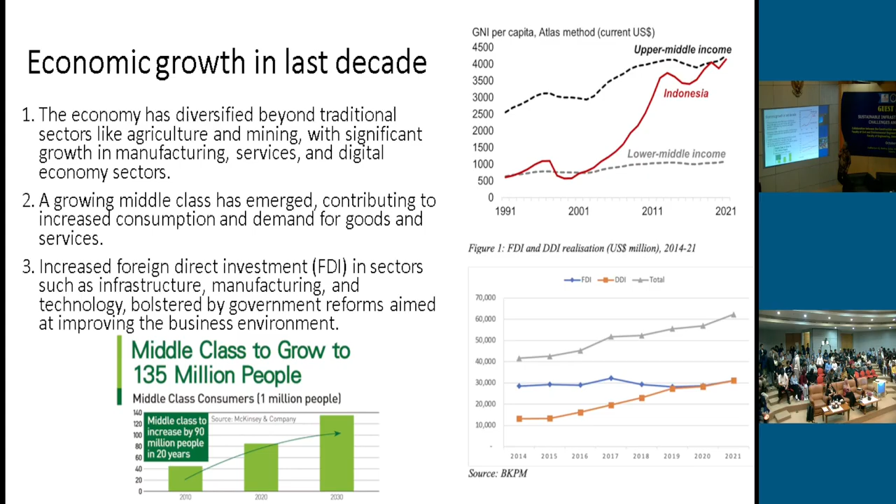On the other side, we also have foreign direct investment in various sectors including infrastructure, manufacturing, and technology. Maybe not very high compared to other countries in the region, but it has helped boost our economy. Although the total is not highly increasing, we have a stable increase in foreign direct investment, stabilizing at around 30 billion US dollars.

Related to this economic development, we have a big need for infrastructure development, which is considered a cornerstone of our economic growth. It boosts productivity, enhances connectivity, and promotes economic inclusivity. Hopefully it can also attract investment despite all the challenges we have. What we need is more sustainable growth supported by infrastructure projects.

For example, public infrastructure investment in the past 10 years has more or less increased, although there was some lag in certain years due to COVID in 2020, but after that it has been steadily increasing. This is a comparison of infrastructure investment in Asia by country, and Indonesia is somewhere in the middle in terms of percentage to GDP — not very high, but also not low. Hopefully in the future it will increase.

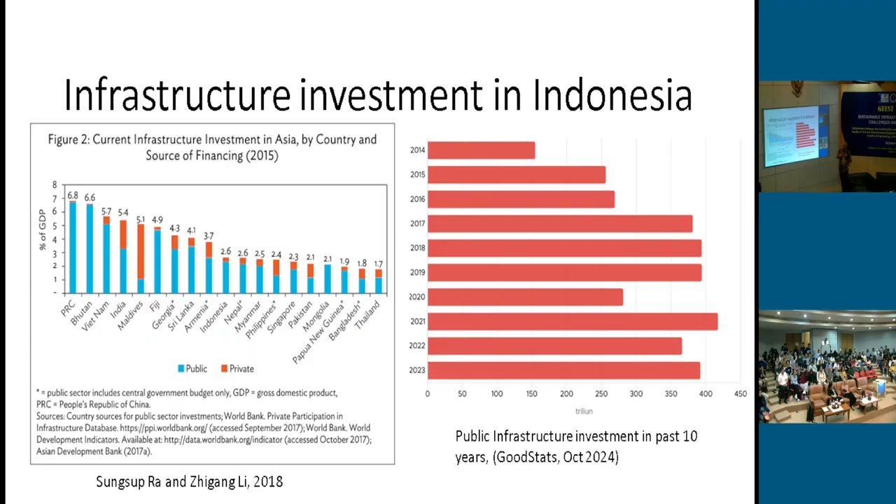Comparing to China, which is almost 7% of GDP, Indonesia is only around 3% of GDP, which needs to increase to have more stable growth in infrastructure provision.

Yeah, this is just an example. In the past 5 years, for example, the achievement in the construction or development of the toll roads, jalan bebas hambatan, freeways in Indonesia. We have 2,700 kilometers all over the country. Maybe compared to China, not much, only within one province. But for Indonesia, 2,700 kilometers is something. Compared to 10 years ago, we had only less than 200 kilometers. So within 10 years, we have 10 times more length of freeway all over the country.

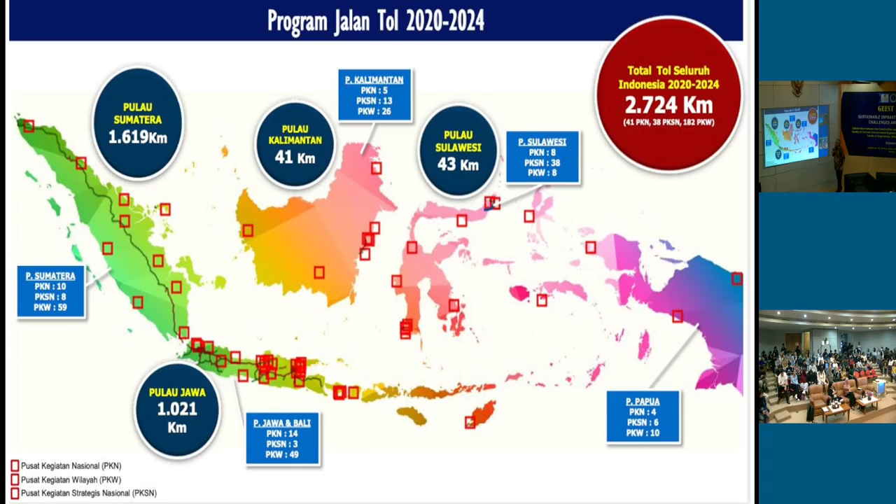Mostly in Java, where we have our concentration of population, but we are also developing highways in Sumatra, the Trans-Sumatra Highway and Trans-Sulawesi Highway. Next.

This is also a plan for investment in the energy sector, to develop the promotion of investments in different parts of the country. The total investment need is up to 10 trillion rupiah in 2020. Now it's much higher than that. Next.

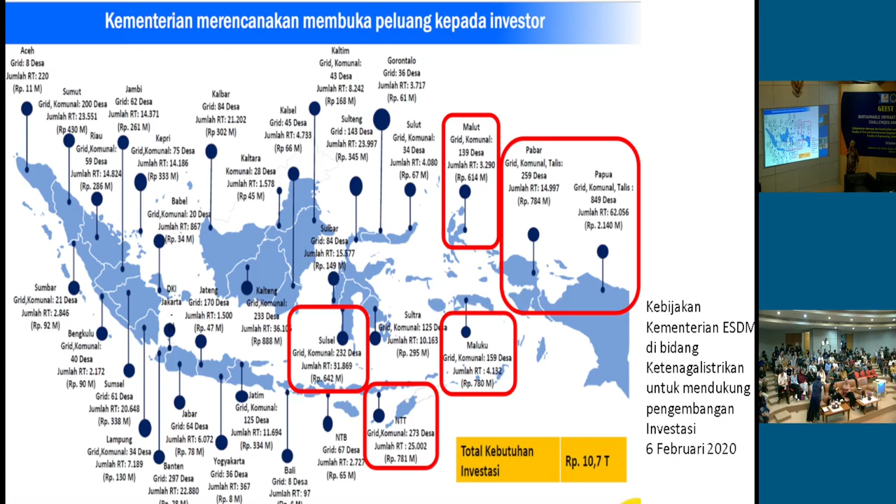We also have a target for 2045, Indonesia Emas, with 5 visions and 8 agendas, and infrastructure is part of the agenda to support all the target achievements in 2045. Next.

Related to infrastructure in 2045, this is our long-term development plan to 2045, to develop connectivity infrastructure and multimodal transport integration. Our goal is to have complete multimodal transport infrastructure, including road network, airports, seaports, and electricity transport. This aims to improve mobility and accessibility of the community to industrial locations and trade centers, thereby facilitating a smoother flow of goods and services.

And also, one of the other targets is to have energy infrastructure most related to new and renewable energy. This is to support the sustainable development goals, because we have an energy transition plan from fossil fuel to more sustainable energy sources, including solar energy, wind power, hydroelectric power, and natural gas.

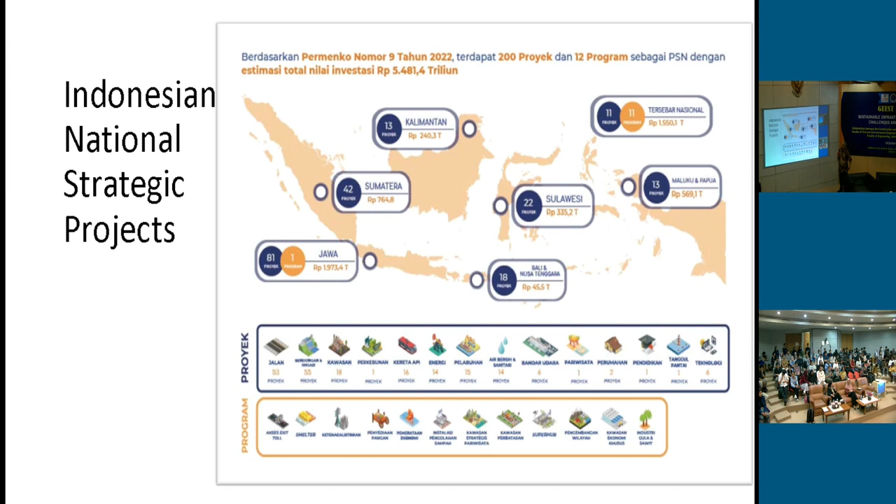Next, we have some listing of, for example, by December 2024, 10 strategic projects. Many of them related to infrastructure, for example, toll roads, industrial parks, new energy in the Morowali area, development of waterfront coastal areas, and also some industrial parks. This is to be completed this year.

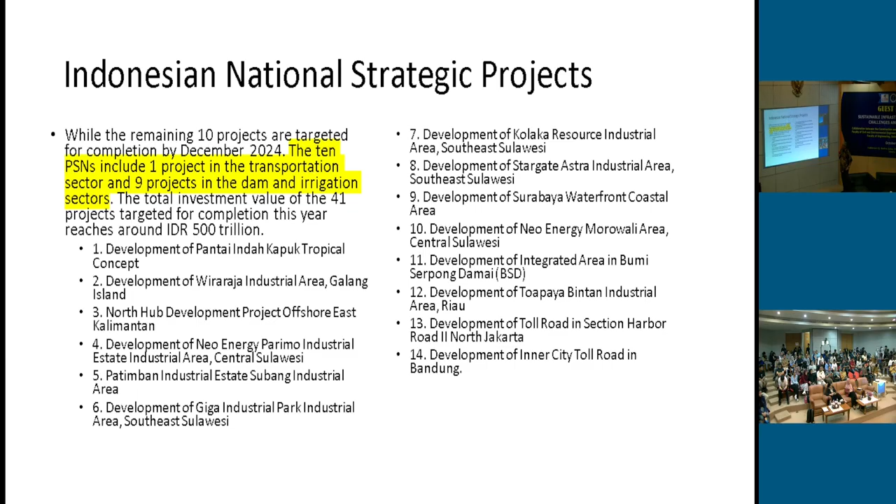Next, we also have a very big investment for Indonesia, the new capital, Ibu Kota Nusantara, with the target toward 2045 Indonesia Emas, which plans to be developed in 3 stages: 2022 to 2024, 2025 to 2035, and toward 2045.

We just heard from our new president that he committed to complete the main constructions in 5 years, until the end of his term in 2029.

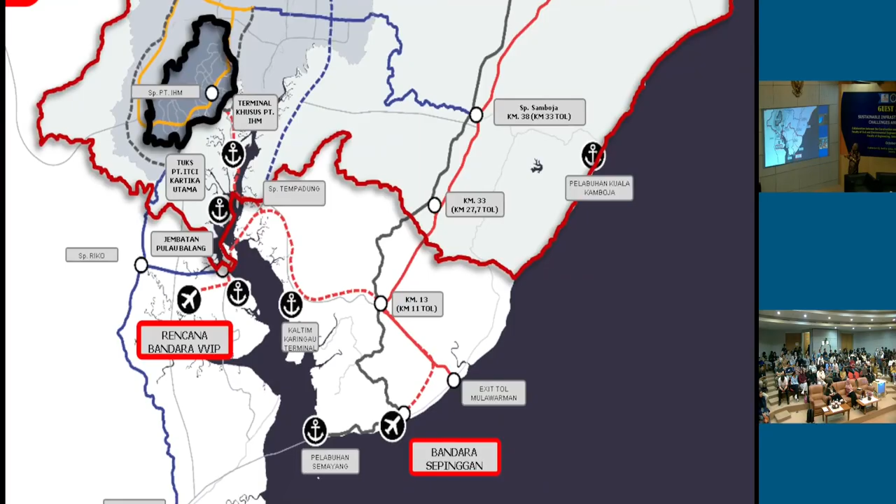Next, this is, for example, the plan for transportation connectivity. Can we go back a bit. Transportation connectivity for the toll roads.

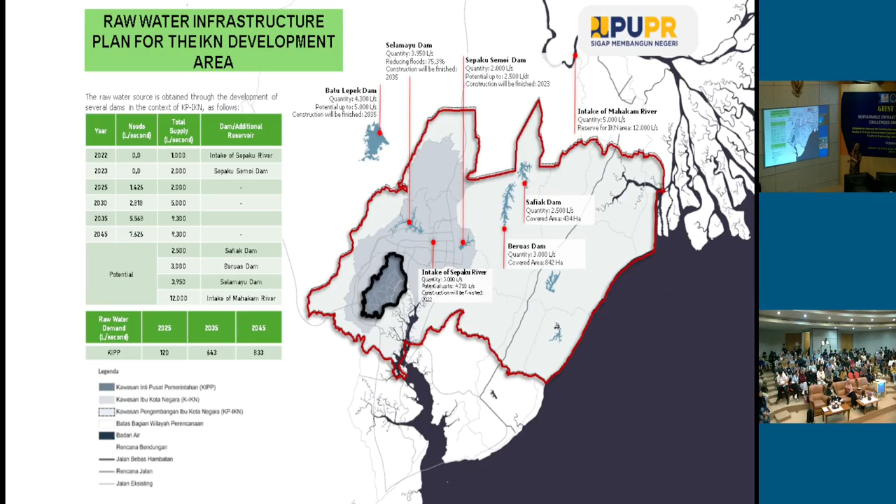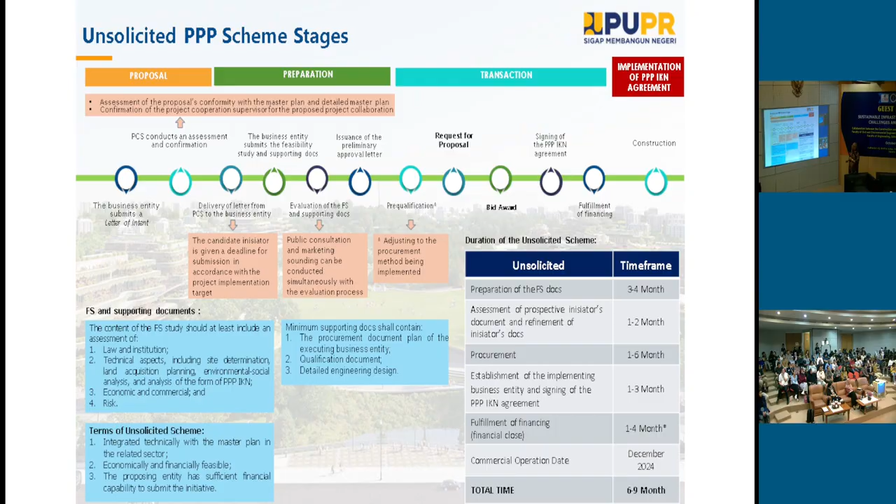I would like to talk also about something different. This is an interesting project in collaboration with China, part of the One Belt, One Road or OBOR project, which is an ambitious plan to revitalize the Silk Road Economic Belt.

We have agreement for 23 cooperation projects in total, and 5 of the 23 projects amount to $14.2 billion dollars.

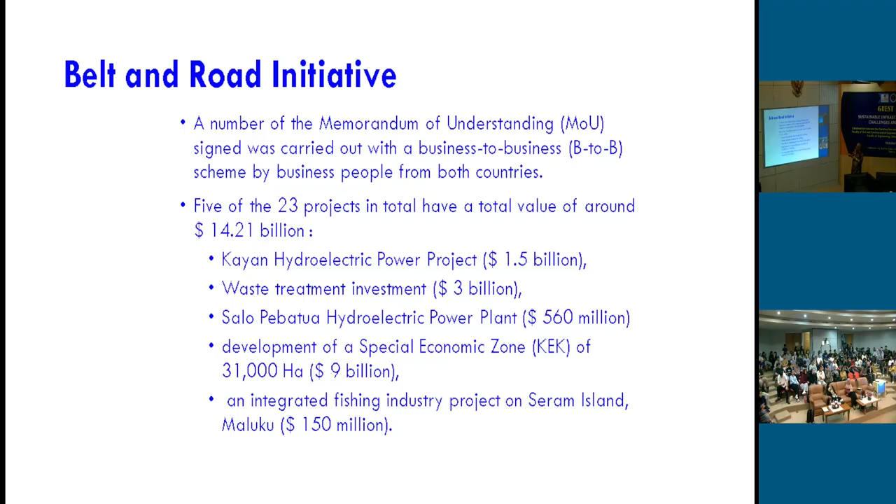In North Sumatra we have the port hub of Kuala Tanjung International Industrial Estate, Sei Mangkei Industrial Park, a gas power plant, and also the Kualanamu International Airport.

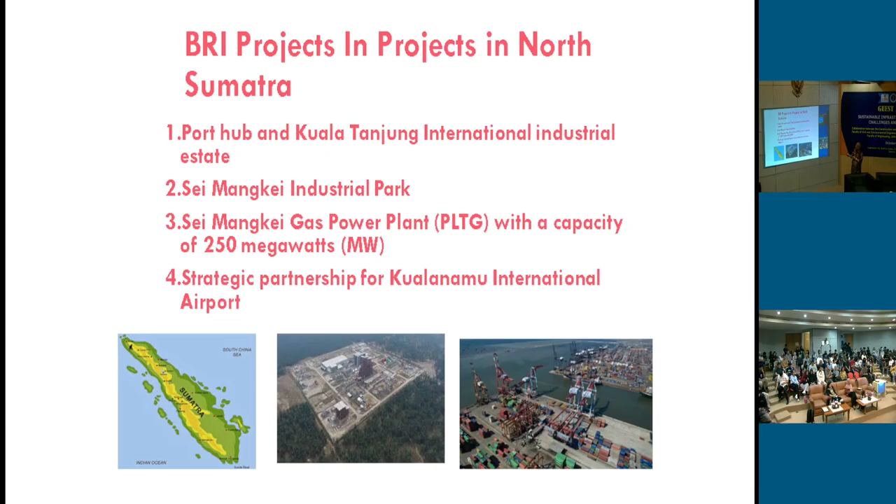In North Kalimantan we have the International Port Industrial Area in Tanah Kuning, the Economic Zone, Strategic Industry in Tanah Kuning, and also industrial estate infrastructure and public facilities including the port, integrated grid for power plants, and the Kayan Hydro Energy power plant.

In North Sulawesi, it's basically a tourism area, the Likupang tourism area, and also the industrial area in Bitung. In Bali, there's the Turtle Island Techno Park project.

Outside priority corridors, we have also 8 projects, mostly on energy, like coal-fired power plants, and also some projects related to integrated industrial areas.

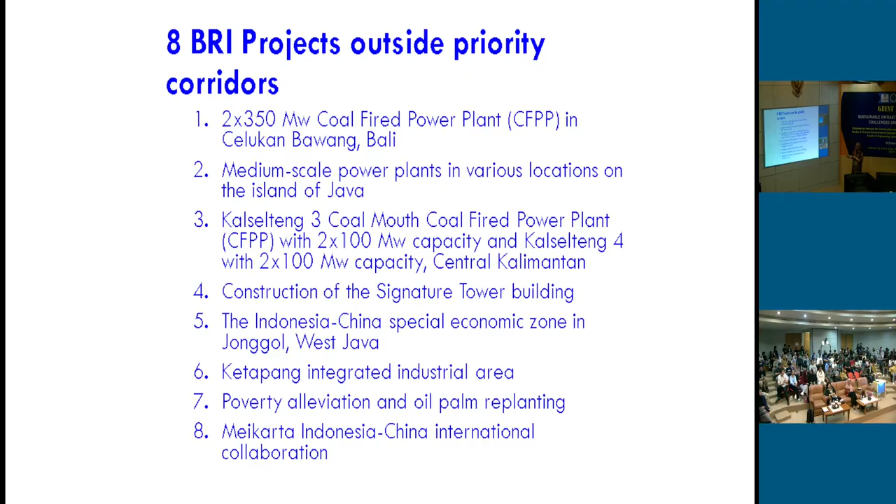In particular, the Jakarta-Bandung High Speed Railway, Kayan River, and Kuala Tanjung are the largest infrastructure investments in Indonesia for the Belt and Road Initiative. The Jakarta-Bandung High Speed Railway is already operational now in Indonesia. It runs 140 kilometers and is already operational.

Maybe when you visit Bandung, you will use this train.

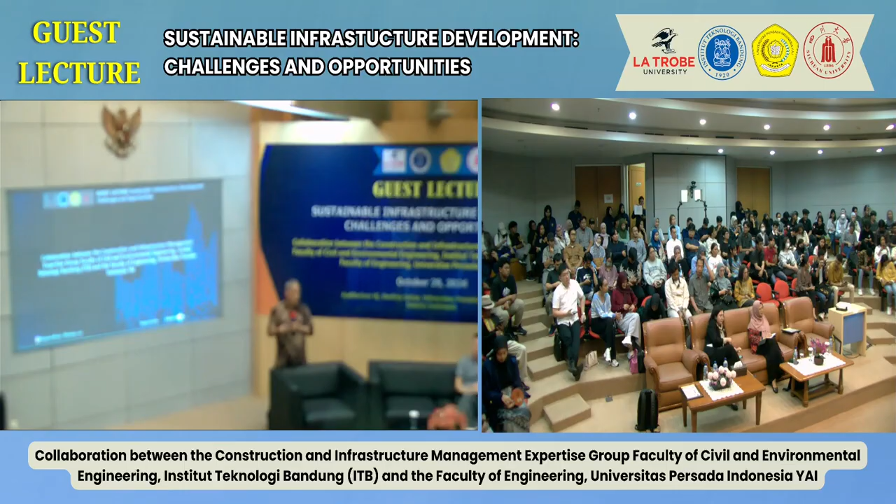Okay, I think for 30 minutes that's all. This was just an introduction to infrastructure development in Indonesia and the needs of the future. I haven't had enough time to discuss the challenges. Actually, we have many challenges, already elaborated by Professor Indri in her introduction speech—the disparity and also issues related to the regulatory and legal system in Indonesia, which is not very clear regarding infrastructure development. So we have a large amount of homework on this.

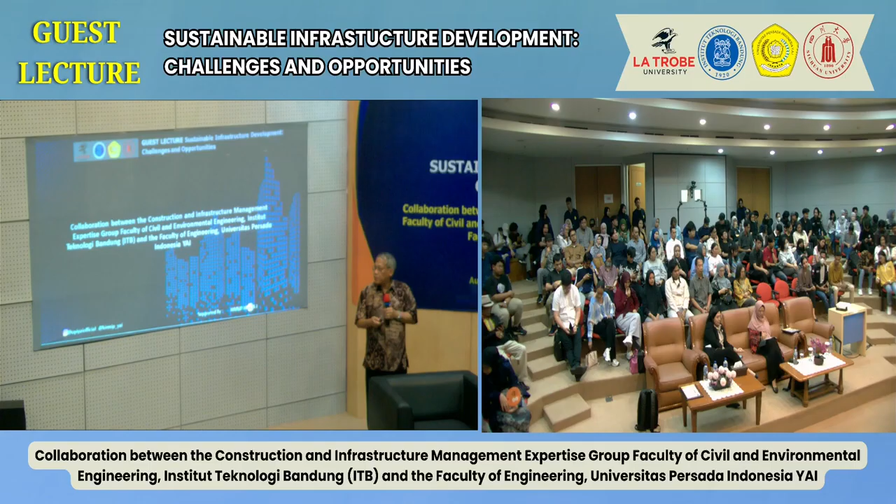Maybe Professor Chan will also talk about the hurdles we have, in particular for PPP projects in Indonesia. I would like to close my presentation here. Thank you very much for the opportunity to give this short lecture. Thank you.

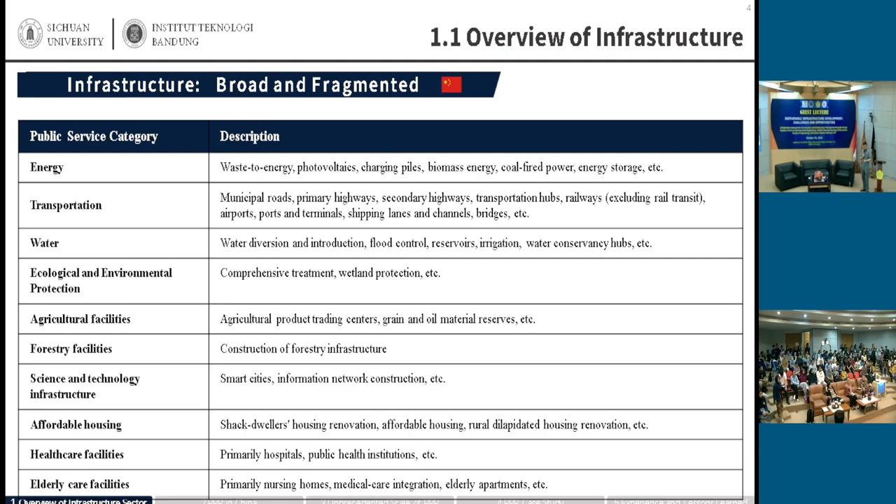So, the key thing is, what's the relationship between infrastructure and the economy? But I cannot turn the slide, actually. Can I? Can you? Oh, okay, all right, thank you. Can I turn pages? Still cannot. But this is the pointer, right? I'm going to turn pages, but, huh? Okay, next please, okay.

So here's the relationship. In development economics, that's a branch of economics mainly focusing on how economic growth could be achieved, those economists give us such a relationship between infrastructure and economic growth: there's a kind of interconnection. So if you have infrastructure in place, then you have a push to your economic growth. However, to have infrastructure built, you need to have the money to fund it. But where does the money come from? From your economic growth. So just like the chicken and the egg, who is first, who is second? That's a little bit complicated. But basically, we believe infrastructure has a primary push to economic growth. So you need to have infrastructure in place, and then you enjoy growth. Based on statistics by Boston Consulting Group, for every $10 increase in infrastructure capacity, $3 per annum in extra economic activities could be achieved.

What do we do? I also talked to some people who told me the renewable energy here in this country is even at its initial stage. Solar power is pretty weak - your installed capacity of solar power is almost none. So if some of you young people here focus on solar power, if you get some technology from China, if you set up a small factory manufacturing those solar facilities, believe me, you can make a fortune.

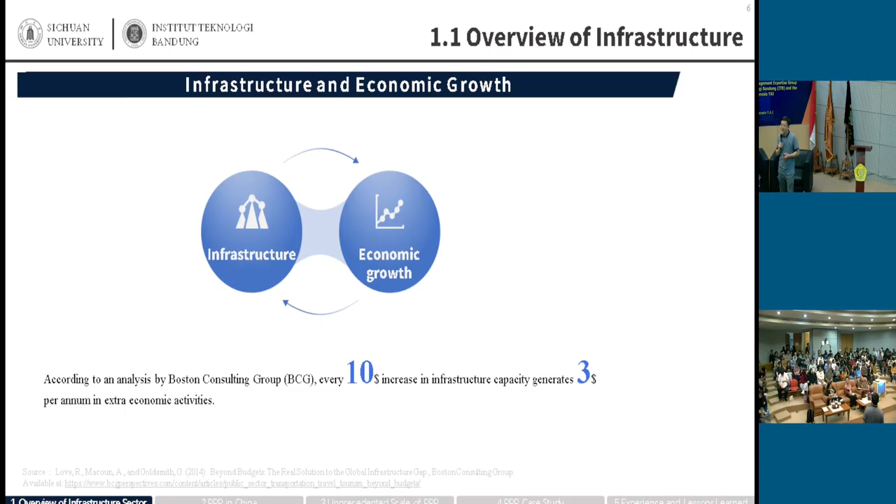You will have your time very soon. Just an interruption - I think everyone should take a chance to visit China and Australia following this seminar. See by your eyes, I think that's highly important, because just hearing is not enough.

Another piece of information from Boston Consulting is this chart. When I first saw it, it was so appealing to me, so I can't help introducing it to you. Here is a chart that shows by 2030, the world needs so much infrastructure in place, but in 2013, 10 years ago, we had the existing capacity of infrastructure at this point. Over time, some of it will lose its function, so the existing capacity will go down. We need new infrastructure to be installed over time.

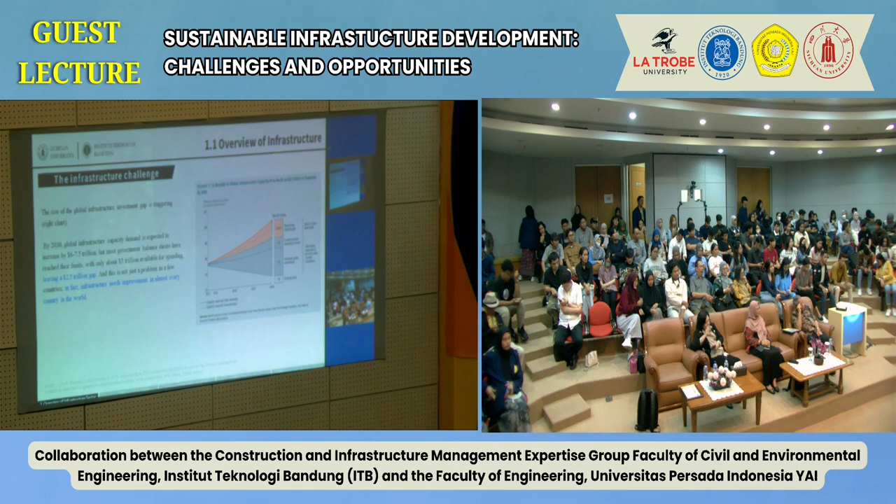But the government can cover this part, the private sector can cover this part. Still, there's a bigger gap here - we don't have financing for it. So the infrastructure gap is there, and we don't have enough finance for it.

How can we do it? Let's go back to the relationship between infrastructure and economic growth. Infrastructure is important to push economic growth, but even with high economic growth, you can't get enough finance to support infrastructure. So it's highly challenging. You don't have money to build infrastructure, but what can you do? You must turn to finance. What's finance? Use the future money now to do something, and then you can make more money, so you can pay it back. That's finance.

So in Indonesia, we don't have enough money. What can we do? We turn to finance. We find some innovative finance technology. We try to use money from the future, from overseas, to build our infrastructure. Then we get economic growth.

Then the fiscal income will increase, then we have more money. Some of it will go to repay the money we borrowed from somewhere, but the extra will be used in other ways. In such a way, economic growth is achieved. That's a simple thing - so the second piece of information is that to build infrastructure, we need finance.

So everyone here, you may think, I'm from civil engineering, finance is another part of the world. You are wrong - you are totally wrong. You must know something about finance. That's highly important. I have been a student in construction management from my bachelor's degree, and my master's and PhD are all in construction management, in civil engineering. But when I was teaching at Melbourne University, I got a scholarship from the university to do a master of applied finance. I spent 1 year to get it, while I still carried a lot of workload.

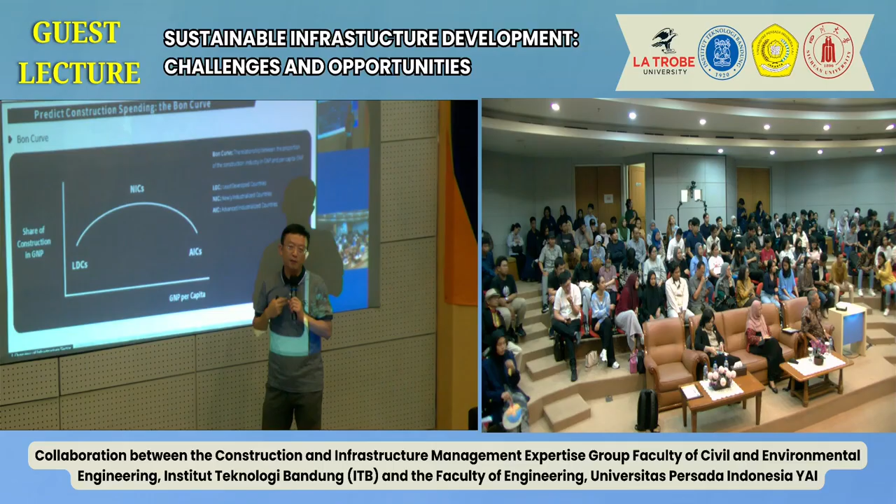That will be fascinating. Why is it fascinating? Because that's my experience. When I was born in China, China was very poor, somewhere here. And then I saw the whole path until we reached this point. China is now facing some economic challenges, we don't know what will happen next, but so far I would say that's a miracle. So you will see it in this country.

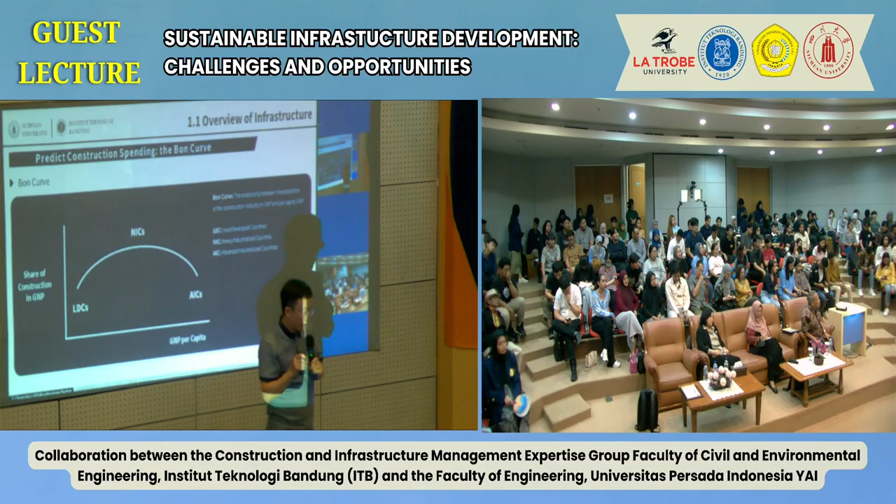So for many years to come in this country, construction will enjoy a growth rate much higher than GDP or GNP. That means if you choose a walk of life in the construction industry, you will enjoy more chances than people who choose other sectors of the economy. So that's why you are lucky, comparatively.

Now let's get back to Bon's curve, Bon's theory. Based on its calculation, there's a bigger gap. But how can we fill that gap? Five strategies were proposed.

First is to prioritize and then streamline your portfolio of projects. That's a key thing. As you can see from what Krishna introduced to you, there's a huge amount of projects to be done in this country. But which of them should go first? That's highly important. As I suggest, focus on connectivity projects and power projects. Those should be prioritized, and let other things, for example environmental protection, go later.

Then you say, come on, Victor, how could that happen? We will have growth, meanwhile we need to protect our environment. That is equally important. No, that may not be wrong, but you cannot do things together. If you choose to achieve everything, you achieve nothing.

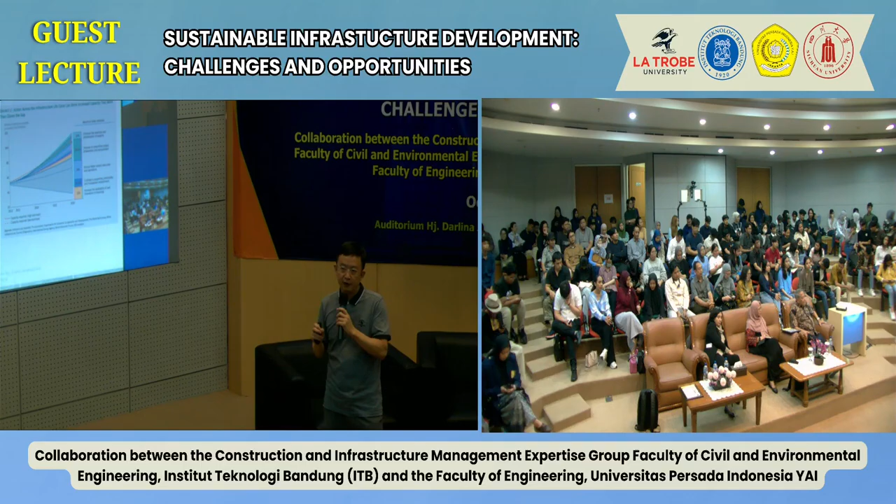So the environment may suffer at the beginning. We may suffer from haze, from dirty water. But be patient, okay? Let's use our limited money to build roads, power plants, make people richer, and then turn to environmental protection. So you don't have to go onto the streets saying government, pay attention to environmental protection, give up some projects like dams. That's not smart, believe me. So be patient in some way. You must follow the principle of infrastructure development. That's highly important, so be smart, don't be silly.

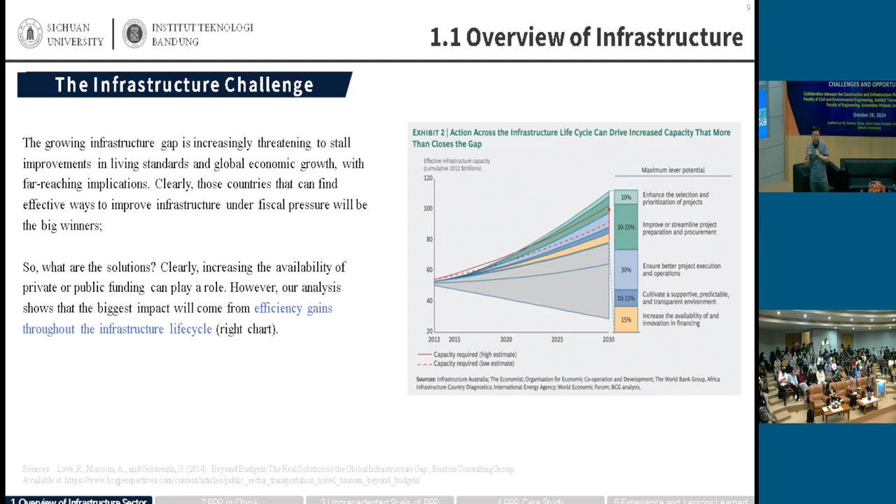And then, I cannot see the second one, it's not very clear. Anyway, you need to speed up project plan and execution. You need to simplify the procedure so that you can reduce transaction cost in construction. That's also very important.

Because when I talk to people in Indonesia, they told me the interest rate here are pretty high. The risk-free rate is about 7%. That means your country is suffering from inflation. In this case, you must finish your construction as soon as possible.

Let's take some example from Hong Kong. In Hong Kong, Macau, and mainland China, people built a giant bridge linking the three parts of China. That project was proposed many years ago, but it met with so many arguments, so the project was seriously delayed. Because of the delay, the actual cost of the project doubled.

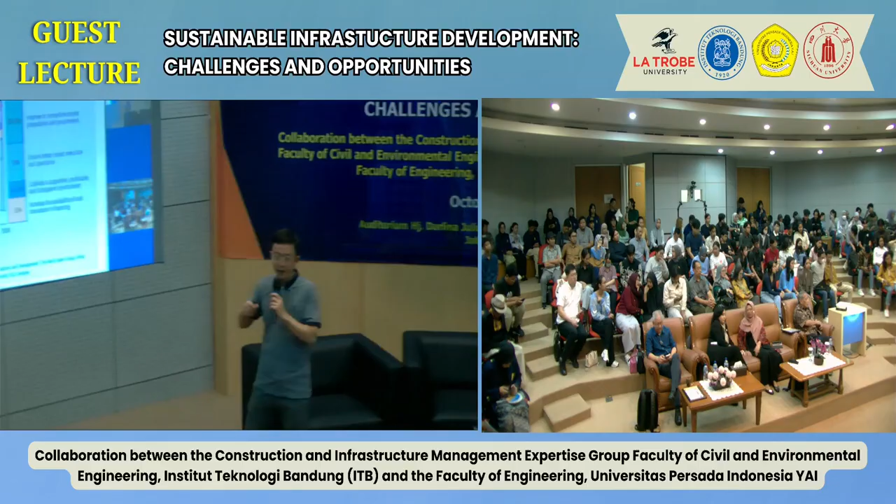So if you want to save money in construction, you need to get it done as soon as possible, because of inflation, because the country suffers from other things, like the price of cement and other materials in construction increasing very fast. So do it as quickly as possible. If you can finish the project this year, in comparison with doing it 10 years later, you save a huge amount of money. So speed up construction, speed up decision making, that's highly important.

3. No, I should switch second and third. No, okay, go back to that chart, this one, make it clearer. Okay.

Cultivate a supportive, predictable and transparent environment. So increasing your business environment, that's highly important. I talked to some elite people from this country. They say this country needs more money from overseas. We use money from Japan, we need to use money from China, we need money from Australia. But to do that, you need to have a good business environment so that foreign direct investment can take place. That's highly important.

Increase the availability of and innovation in finance. Again, we get back to finance. So I hope you guys here can learn finance. We have four faculties in this university, we have business and economy. So students from engineering, go to your professors in finance, take their courses, learn from them. That's highly important.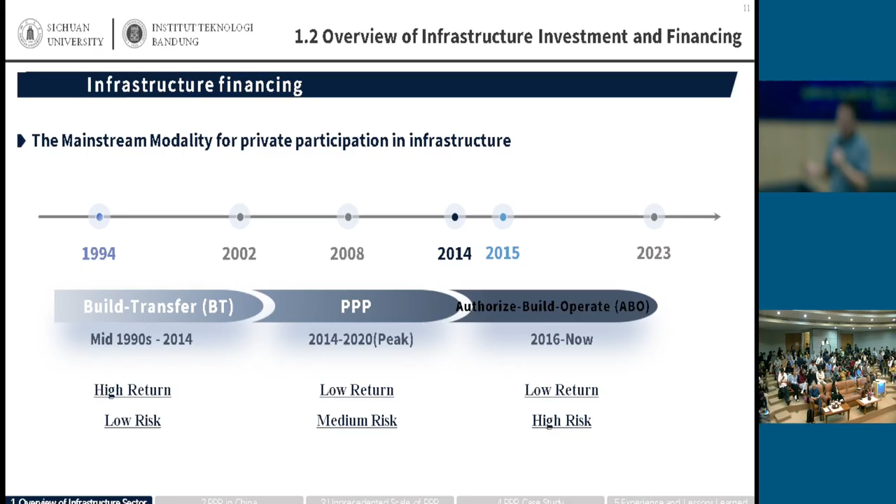So learn from China, just like Vietnam. Vietnam copied this kind of regulation from China, they just use it. Of course, they will see which can work, then they use it. I think Indonesia can learn from many other countries, including China, so you can pay less price to get it.

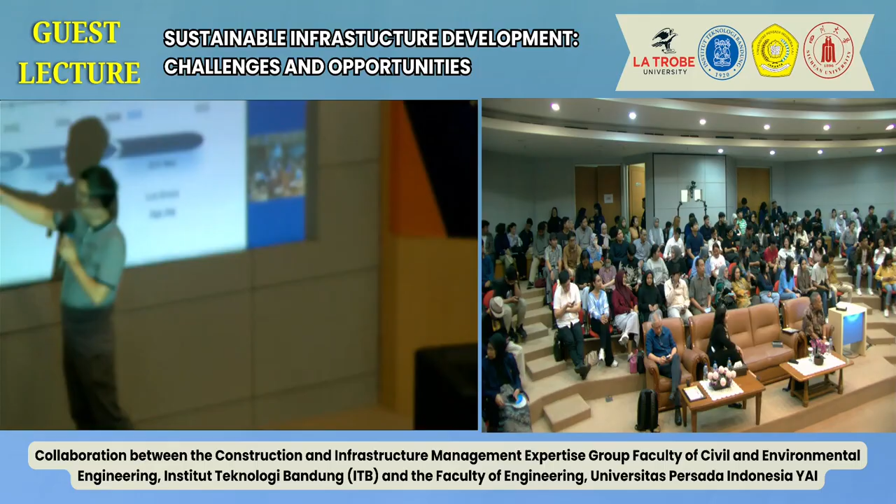But anyway, despite so many finance methods, at different stages of our development, there was always a single one which prevailed at that stage. For example, from the mid 1990s to 2014, we had build-transfer as the most important project delivery system. Then from 2014 till 2020, we got PPP. Following that, we got ABO. Many of you may have not heard about ABO.

It's China-made, made in China. You cannot find it in any journals or books. But what is it? Believe me, I think ABO can be applied in Australia or in Indonesia, but that takes a long time to introduce. I don't have time, but if you're interested, you can see.

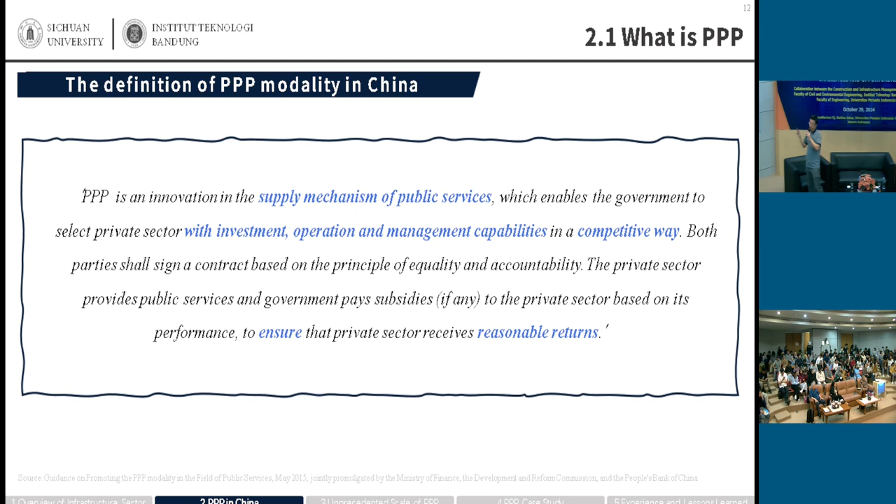Next, please. Today, I would like to just introduce PPP in China. Actually, for the past two days, I talked with a lot of colleagues here about PPP. I found there's a high similarity between the two countries with regard to PPP, so I don't have to talk too much about the definition or some basics. I mean, they're the same, everybody knows, I think. Next one, please.

I would like to show you the nature of PPP. I think PPP has a very strong logic where the public and private sectors, which are very different parties, have complementary resources and capabilities. PPP as a project delivery system puts the two parties together, maximizing their complements and minimizing their conflicts so that good performance can be achieved. That's the beauty of PPP. No matter how you arrange the contracts, you must maximize complements and minimize conflicts. That's key. I have successfully finished more than 300 projects, and this logic is always at the bottom of my heart. That's highly important.

This may be difficult to understand, but just bear it in mind. I think one day it will help you command this kind of delivery system.

Again, China is so similar to Indonesia, where most of the private sector developers are state-owned enterprises, not truly private companies. That's a big issue because a very dangerous issue could happen, called risk backflow. That's the third point I want you to know from my presentation.

So here are some success experiences from China. The first is comprehensively assimilating domestic and international expertise. In China, we learn by doing, and we also borrow from other countries, many from the UK and South Korea.

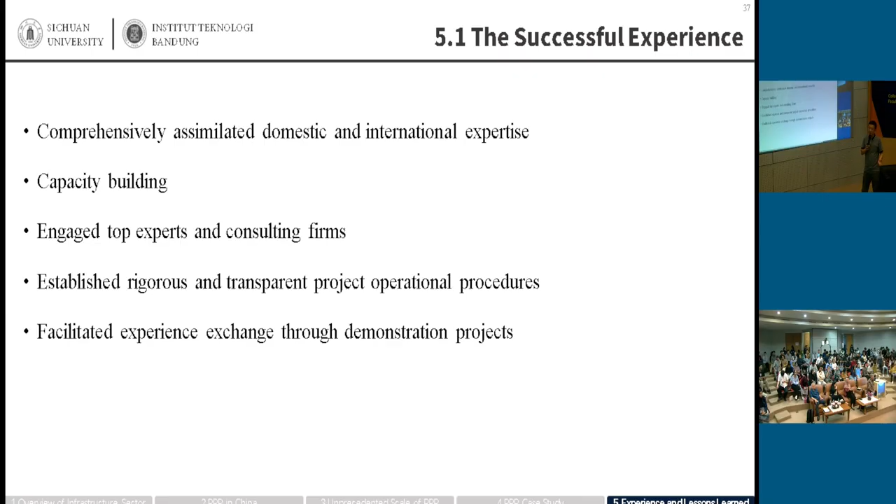Second, capacity building. The country organized a lot of seminars and training programs to train local government officials about PPP. Meanwhile, they also train the private sector.

Third, engage the top experts and consulting firms. There are so many excellent experts and consultants who have been deeply involved in PPP projects.

That's very important. Fourth, establish rigorous and transparent project operational procedures. Maybe different from Indonesia, in China there's a very specific pathway to do a PPP. Every step is strictly requested, so you cannot miss any step. By this clear-cut procedure, every project cannot be out of control.

The fifth point is facilitating experience exchange through demonstration projects. Interestingly, in China we have a demonstration program. Each year the government selects several projects as demonstrations, showing they can be copied anywhere, so other projects can learn from them. This kind of demo project plays such an important role in China.

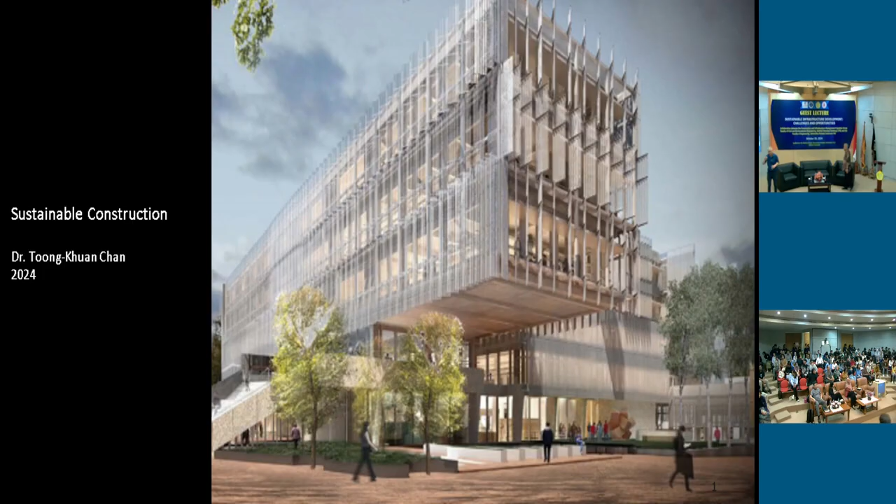My apologies. So what I'm going to talk about is a case study. Instead of talking about sustainable construction generally, I'm going to give you an example of how a sustainable building is built in Australia. As some of you introduced me earlier, I was 16 years at the University of Melbourne, and my office was up here. Pak Krishna has visited me, and he thinks this is an amazing building.

So let me tell you how amazing this building is from a sustainable perspective. There were sustainability issues in all aspects of the construction - in the demolition, in the construction, in the design - and I will be talking about various sustainable features throughout the entire building. My former student Mike here will correct me if I'm wrong because he studied at this building. So we have different materials and different systems within this building.

What I'm going to spend a lot of time on is cross-laminated timber. Cross-laminated timber is a relatively new product available in Australia, and it's a difficult material to use. Next slide.

So we will talk about opportunities for recycling. Being sustainable, well, the most sustainable thing would be to use the old building and not build a new one, correct? But we needed a new building, so we got this. There were opportunities to recycle the old materials. I will talk about the construction aspects.

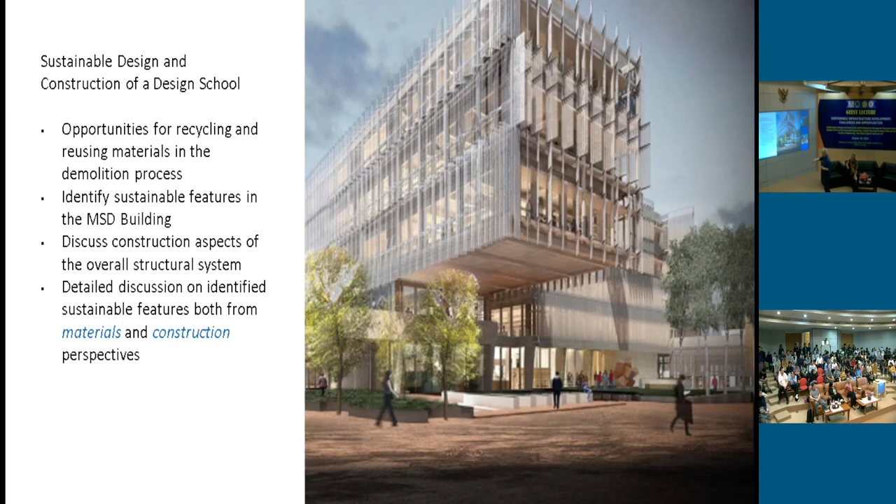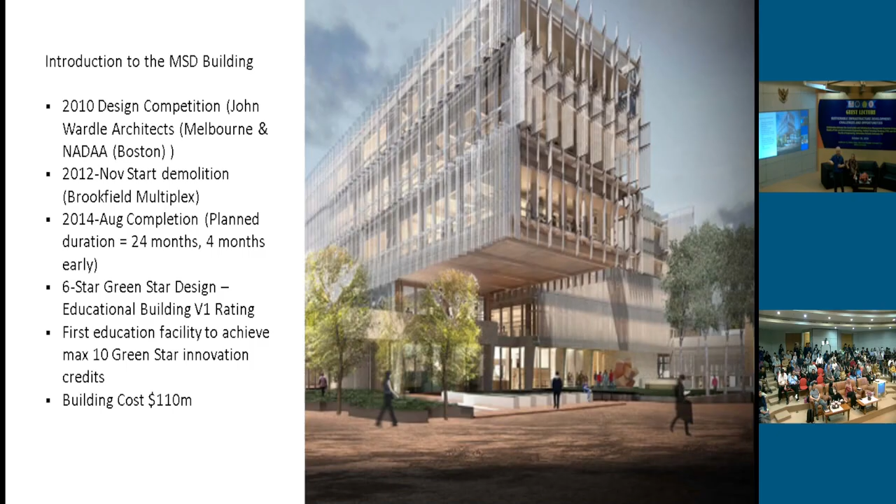Next slide, a little bit of introduction. There was a design competition - you guys know about design competitions. Instead of appointing an architect, they have a design competition where several architects compete, and the best design is chosen. So in 2010, a design competition was held.

In 2012, we knocked down the old building. I got kicked out, and we moved somewhere else. In 2014, we moved back in. The planned construction period was 24 months, and we finished it early - or rather, the contractor finished it early, I didn't do anything. It was advertised as a 6-star Green Star design building, the first educational building that achieved the maximum number of stars available.

The building cost 110 million Australian dollars, which is approximately 1 trillion rupiah - 1.1 trillion rupiah for a very small building. Next.

So during the demolition, all the steel reinforcing bars were reused. We would extract them and send them for reuse. The concrete was also used as crusher run.

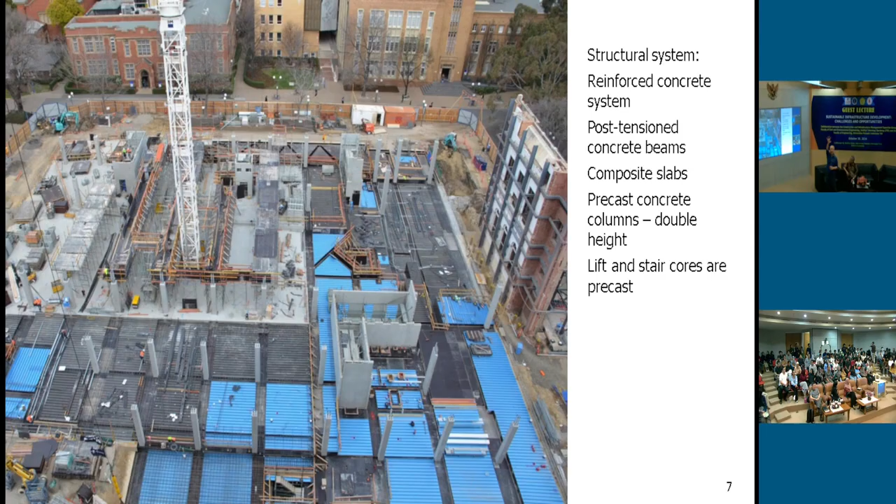So this is a closer view of how the building was built. The lift core or stairwells—these are the 3 lift cores, and that's a stairwell, all precast. The slabs were cast in situ. There was only one tower crane.

Another reason for having all the vertical elements precast is concrete strength. Concrete takes time to gain strength, so if your columns are cast in situ, you have to wait for them to gain strength before putting another level on top. But if you precast, it comes at full strength. It's fine to cast the slabs in situ because slabs don't carry another floor—only the columns carry another floor.

Next, the building envelope. All those walls are also precast—very high quality precast, and only one factory in the whole of Australia can produce high quality precast walls like this. It came all the way from South Australia, Bianco Precast. Is that a green or sustainable decision, coming from 1,000 kilometers away? Not so much.

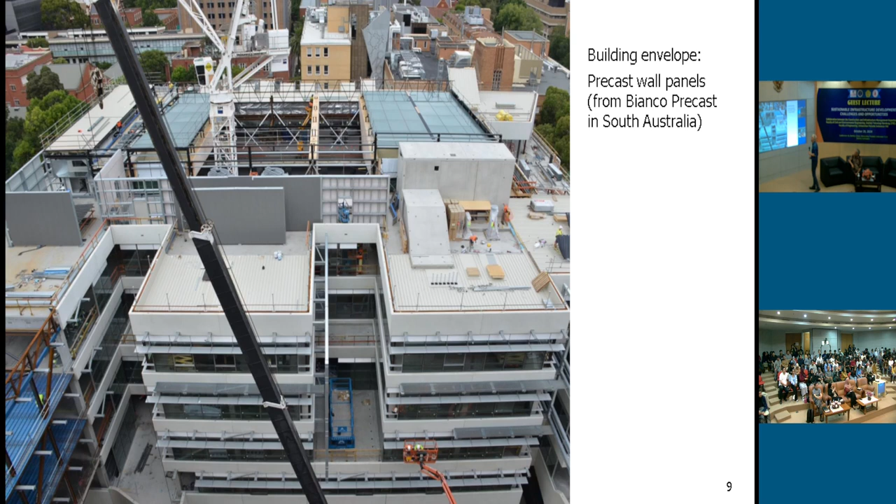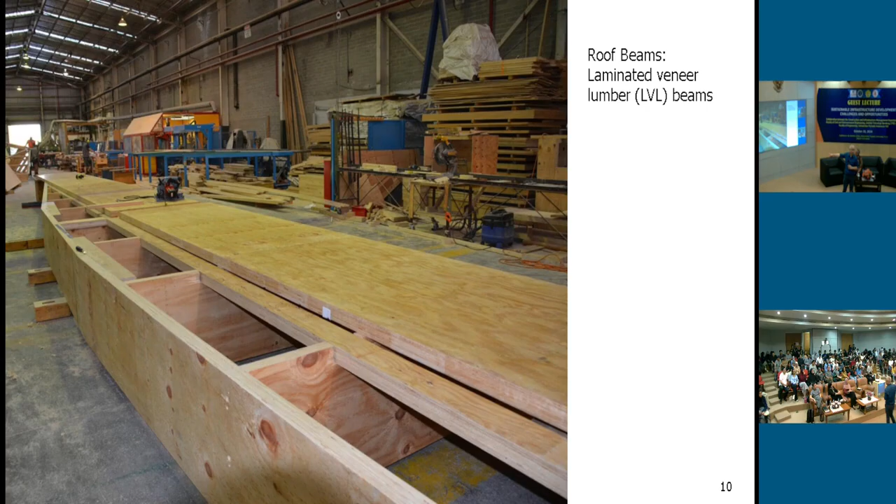The roof beams—there was a big atrium inside the building—were made out of LVL beams, laminated veneer lumber. The reason for using this is that timber is renewable, and it could span 17 meters. So instead of using steel or concrete, the architects chose a renewable material for the roof. There were also some coffers, again all made out of timber because it's a renewable material.

This is how the roof beams were installed. From this side all the way to that side was 17 meters. Those of you who remember your bending moment diagram, the mid-span should be thicker, and it's a lot thinner towards the ends.

This is the view from below, showing the roof beams.

I lied. Timber is not strong enough. So within the building, over a 17-meter span, there was a room hanging off the roof. The architects and engineers had to hide a steel truss inside the timber beam.

This is the steel truss hidden inside two of the beams to carry hanging studios. Of course it needs to be fireproofed, and covered up in timber so you don't know there's a steel beam on the inside. This beam is actually steel, supporting a steel structure for another room suspended off the roof.

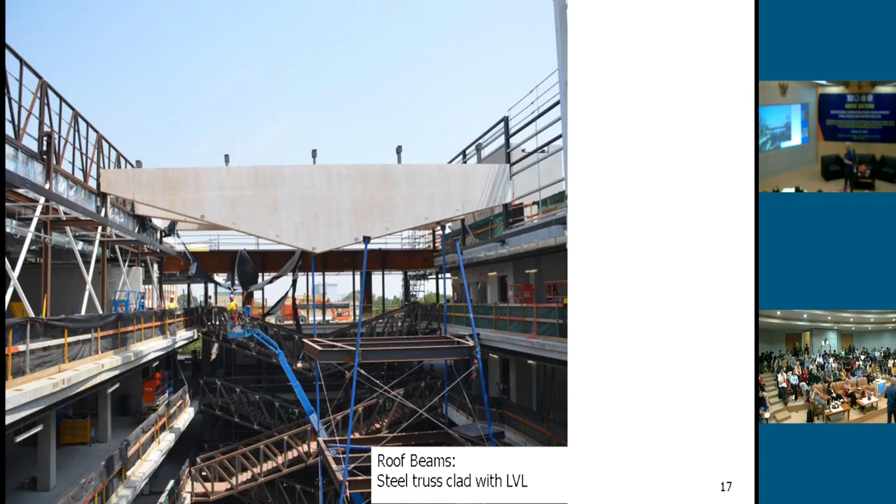So that's the timber beams going in, view from below.

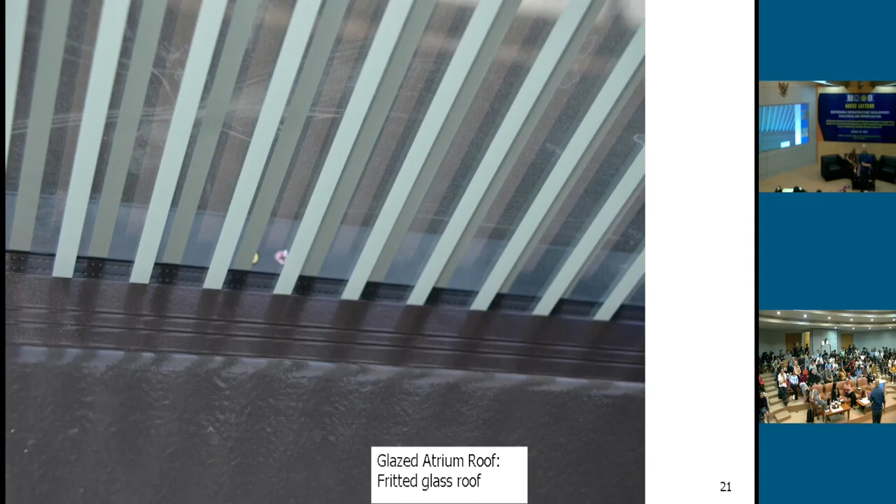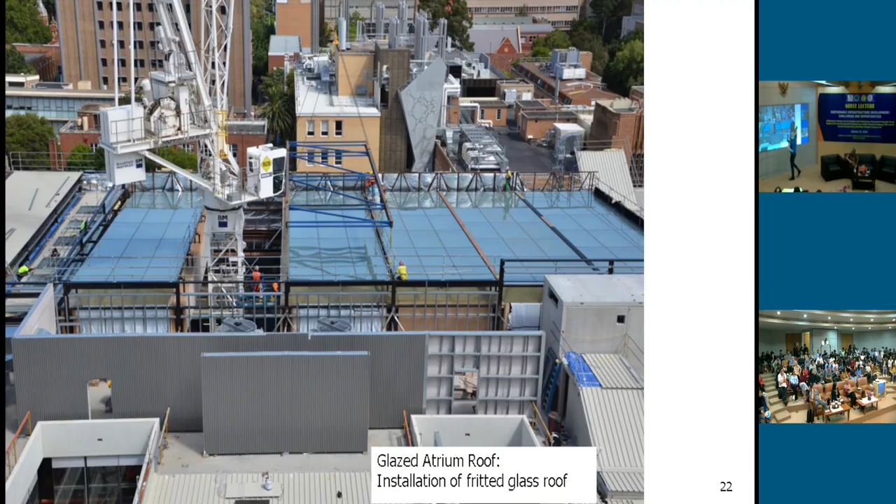As you can see, the building footprint is very large. They had only one tower crane, and that tower crane erected 6 of those roof panels.

Apologies to my good friend over here. The glass was made in China.

How to replace it? How do you replace this? Because we've already removed the tower crane. It's a very big building. One piece of glass breaks - how are you going to take it down? That's a story for another day.

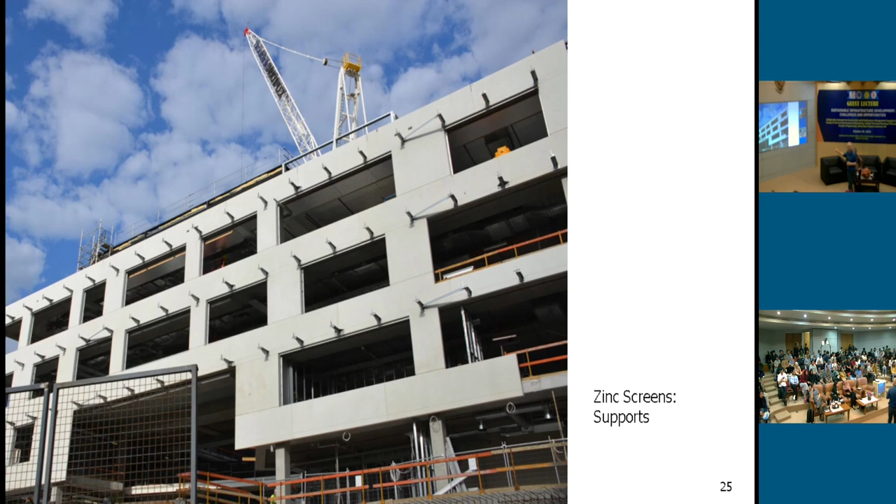So the entire north, east, and west side of the building were all covered with zinc screens. That's the zinc screen during the installation process.

Now this is when we listen to the architects. Are there any architects here other than my student Mike? Good. The architects decided that every single screen is different.

Civil engineers and construction managers, what do you do? If every piece is different, yeah, we always try to question, will the architect notice if we swap them around?

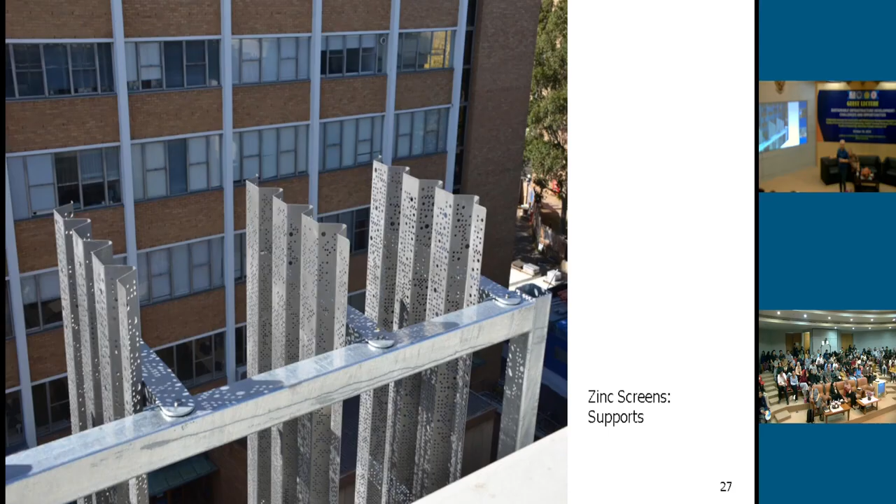We don't know. So that's the view from the inside. I think this was... no, this is not from my office, this is from the dean's office.

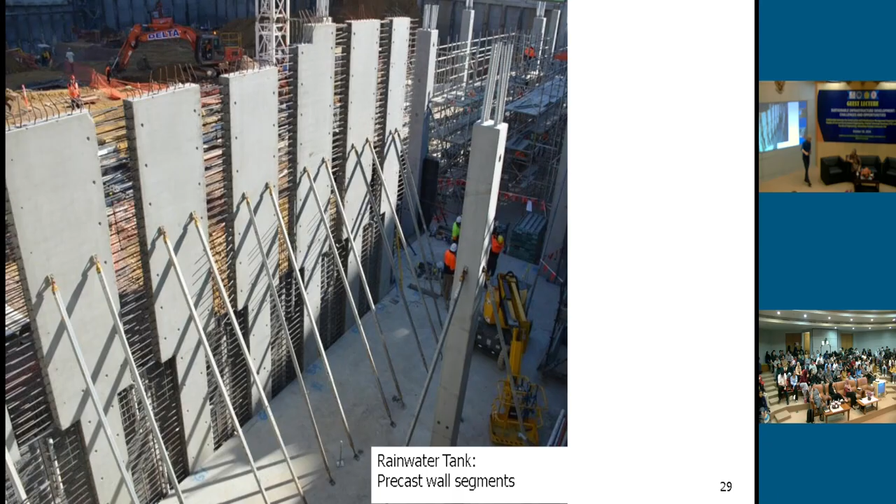So these are the construction aspects of the rainwater tank. Like I told you previously, they tried to precast every single piece of the vertical elements, and the intermediate piece here was filled with concrete. That's the rainwater tank.

After it has been precast, it is connected between the two precast panels. So that section will then be poured with fresh concrete later on.

Now, the architects, or rather the client, decided we wanted to try to use cross-laminated timber to improve its sustainable credentials. Cross-laminated timber is what we call giant plywood - it is like plywood, what do you call plywood? Papan lapis? Kayu lapis. Kayu lapis is usually 16mm, 19mm. This is 150, 200, 250mm thick.

So it's giant plywood. This is considered renewable or greener because it's a renewable product - you can grow it in the forest, cut the trees down, make this, and regrow your forest. So we wanted to use this for all the floor slabs. Is that a good idea?

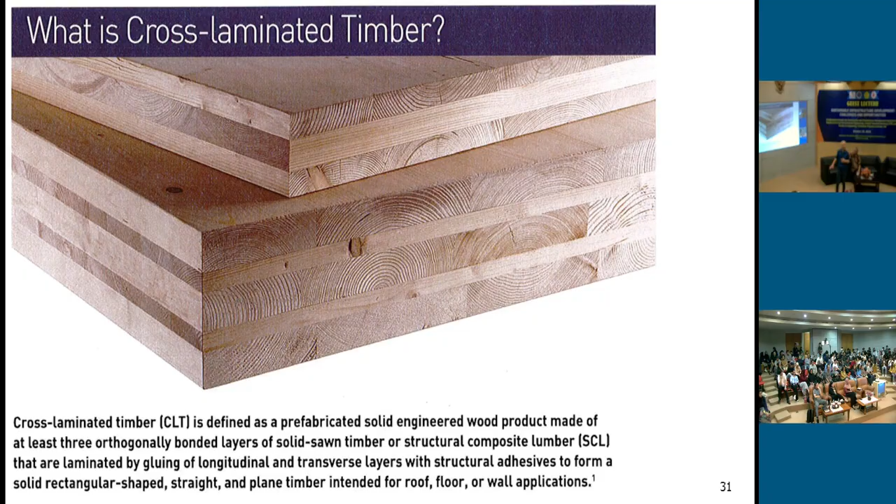Is that a good idea? Come on, come on. Sustainable, right?

There are some examples of cross-laminated timber being used all over the world. So we thought that it was a good idea. The architects thought it's a brilliant idea. Architects love new materials, construction people hate new materials. But architects loved it.

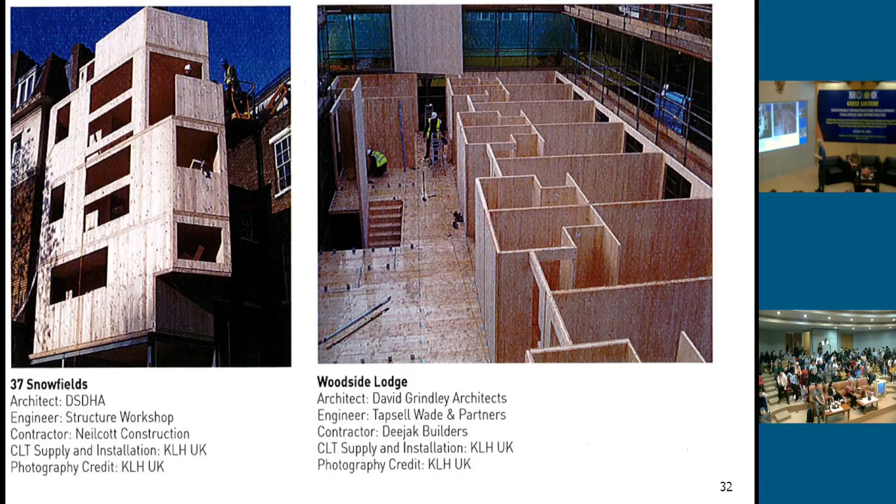Because there were not many examples of cross-laminated timber during that time, the engineers decided that we had to carry out several tests. They took up, I think, 9 or 12 test specimens, 4.8 meters long, 500 wide, 150 mm thick. And those of you who are civil engineers will realize that there was a concrete layer put on top, so it has to be acting in composite action. So there must be a shear connection between the concrete layer at the top and timber at the bottom.

The concerns were that it could deflect, it would bounce a little bit. So if you put a layer of concrete on top, it becomes much stronger, stiffer, reduces noise transmission - you know, ladies wear high heels, you don't want that sound to go downstairs. So there was a testing program to examine the shear connection between concrete and timber.

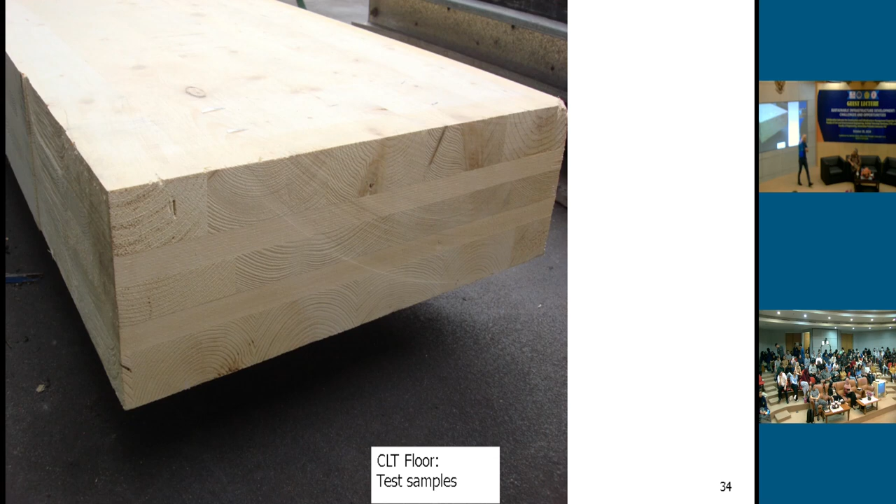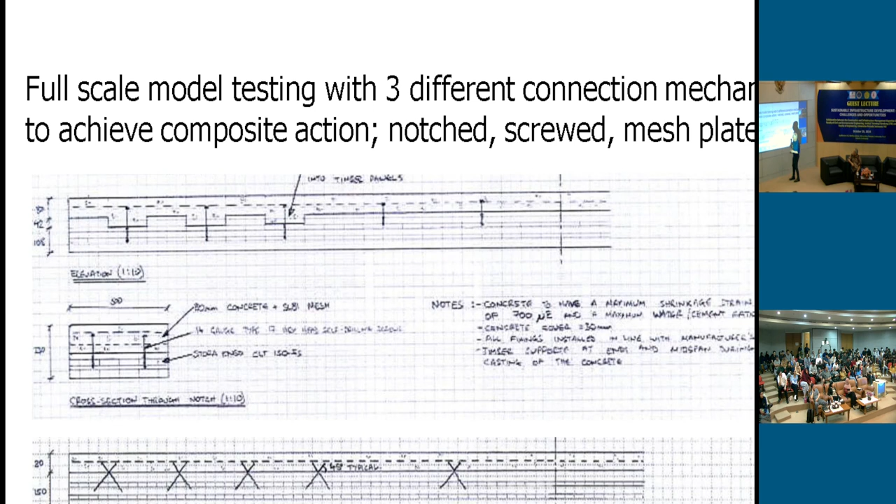3 different methods were tested: notch, screws, and mesh plates. Okay, so 3 different methods were tested.

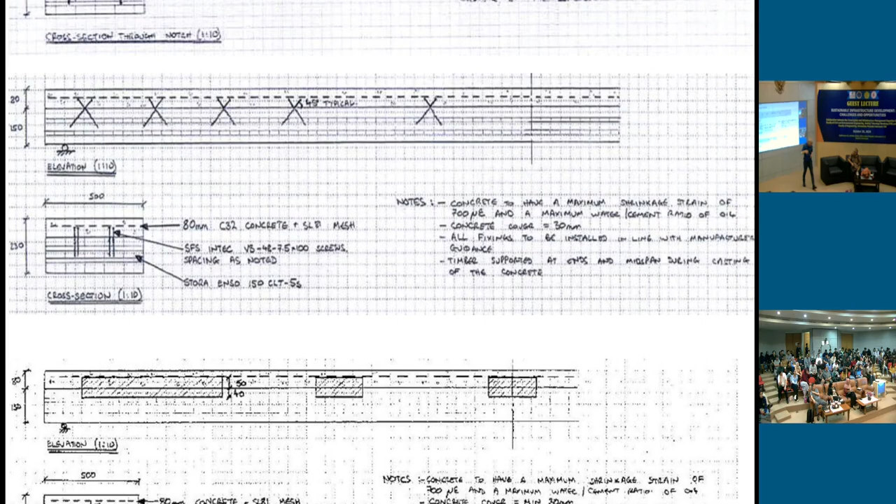So these were the test specimens. Every method had 3 samples. You can see here it's notched, and there was a layer of steel mesh put on top. This is what we call type A, notched.

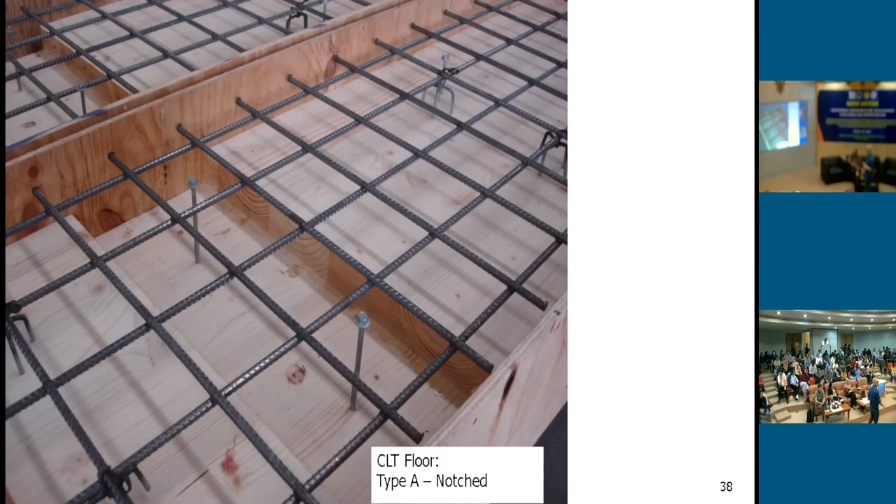You can see the cutouts. Zoom in onto the cutouts - the concrete will eventually fill into this space. These are, I think, 8 mm reinforcing bars at 100 spacing.

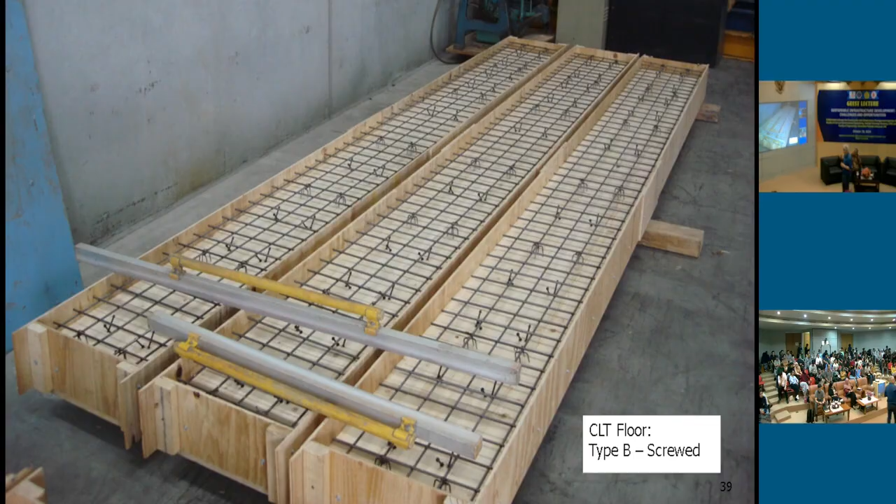Type B, having screws going in at 45 degrees. This is a view. And this is where a shear plate was inserted.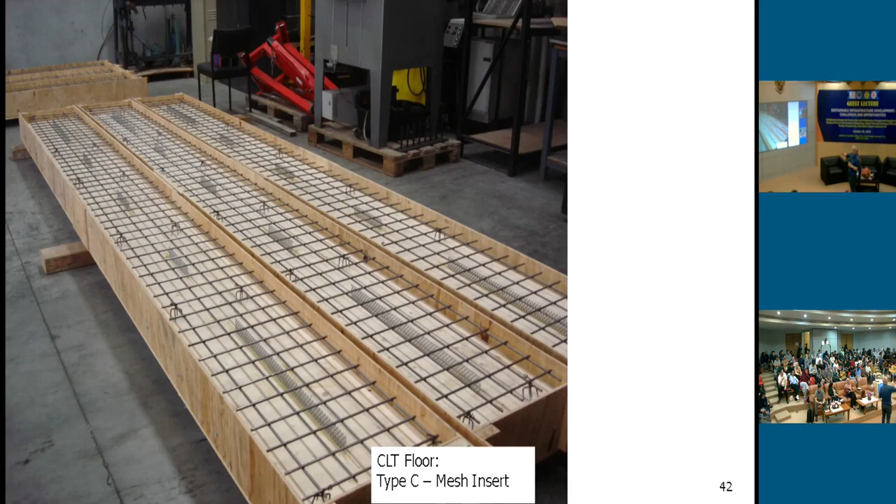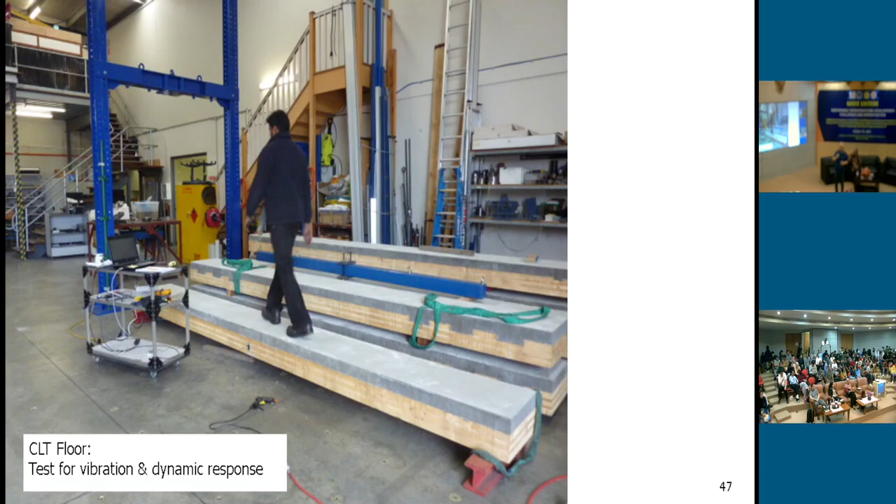Concrete was poured. So after 28 days, they started the testing process. Somebody walks on it to see its dynamic response, because with timber it tends to be a bit bouncy. And it goes into a full load test.

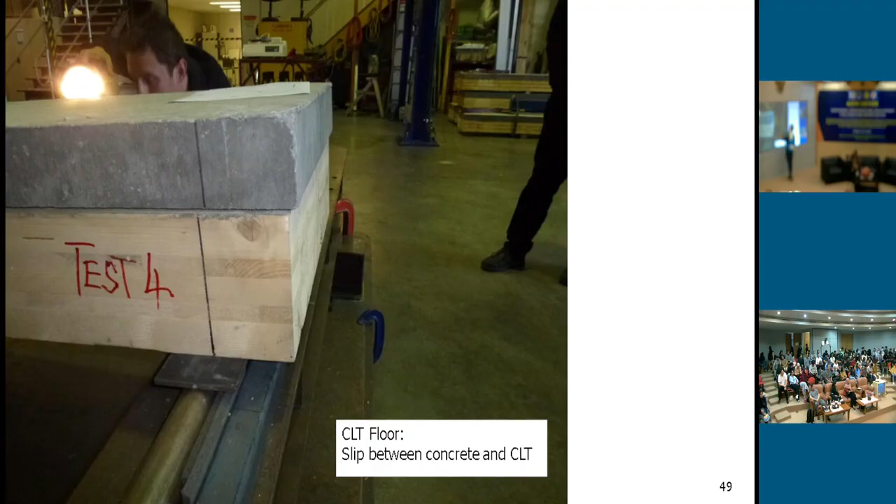Obviously, the concrete layer would slip from the timber layer at ultimate load carrying capacity. So these are all the load test rigs. You can see it pushing - this is type A, pushing against cross-laminated timber.

Then the whole piece delaminates. Remember that the CLT was 5 layers - 1, 2, 3, 4, 5. It just splits right across.

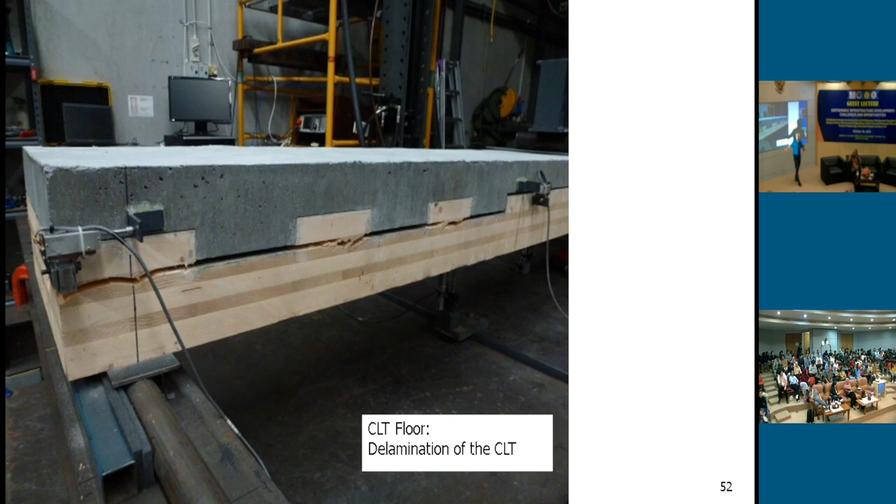This is the tender set of drawings. So the floors were supposed to be cross-laminated timber right across, but the beams were concrete. So the plan, the brilliant architects and the brilliant engineers thought that the floor should be timber, concrete - beams supporting the floors were concrete.

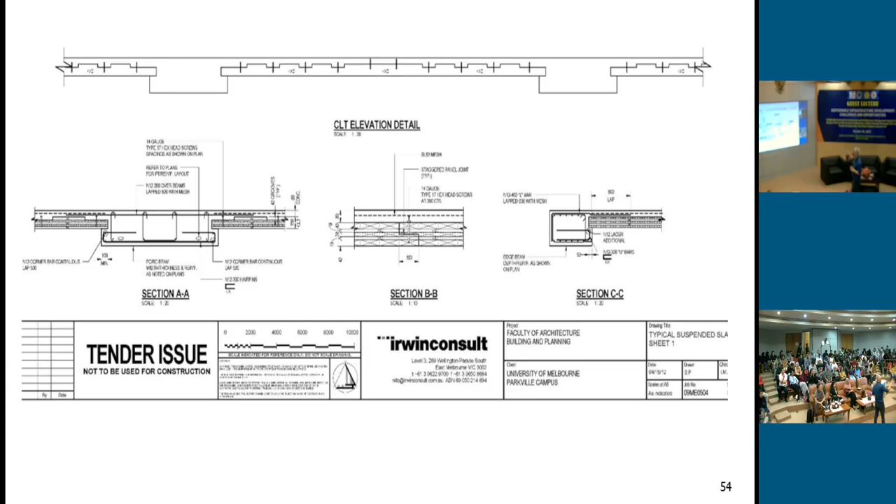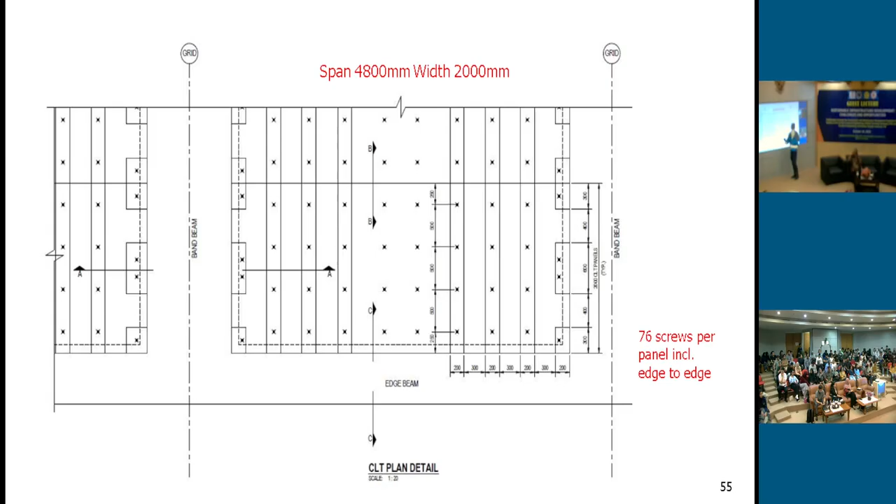So if you look at this from plan view, band beam is here, edge beam over here, this all the way to here is cross-laminated timber. The cross-laminated timber is 150mm, and there should be about 80 mm thick of concrete on top.

Testing was done, contract awarded to the builder. So now the construction managers come in - what do they need to do? Finish on time. So they think, where do the cross-laminated timber come from? Where do you buy cross-laminated timber? Austria. We are in Australia. Timber comes from Austria.

Not very sustainable, as Pak Krishna says. It has to be shipped, and then there is the risk of your ship not coming on time. So as the contractor, builder, you'll think it's very dangerous if it doesn't come on time. The underside of the cross-laminated timber is exposed - can you imagine looking up and you see the underside of the timber? You will think that the contractor forgot to remove the formwork.

Very tight fabrication tolerances. For the contractor, this is their first time working with cross-laminated timber. Remember the shear connections - the bolts, the screws have to go in at 45 degrees. How do you screw a screw at 45 degrees? It's very easy to do 90 degrees, but 45 is difficult. So all the shear connections were labor intensive, very difficult to do.

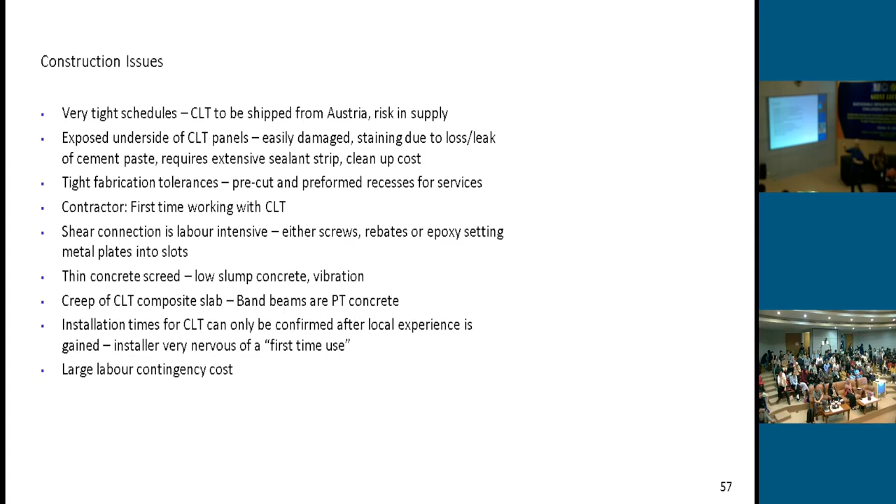What did we do? We spent $500,000 on testing. We wasted 6 months of testing. Then we said no to the architect and to the engineers. So it's a sustainable idea, but we decided not to go ahead with it.

So we changed that to the Bondek. Remember I showed you the blue Bondek? Why didn't you ask me? Was I lying to you? What am I talking about all this when I showed you the solution? The solution was Bondek. There was no cross-laminated timber used because of all these issues.

So cross-laminated timber and concrete composite was completely replaced with Bondek, purely based on supply and install subcontract prices. We could still get some of the green credentials by using concrete that had 30% fly ash and some recycled aggregates. So these are other sustainable features that we could add into the project to maintain its Green Star rating.

So it doesn't always have to be new materials or sustainable materials. It was possible to still get green concrete and maintain our Green Star rating.

What happens to green concrete? What happens to concrete if you add fly ash? What happens to the concrete strength? Is it stronger or is it weaker?

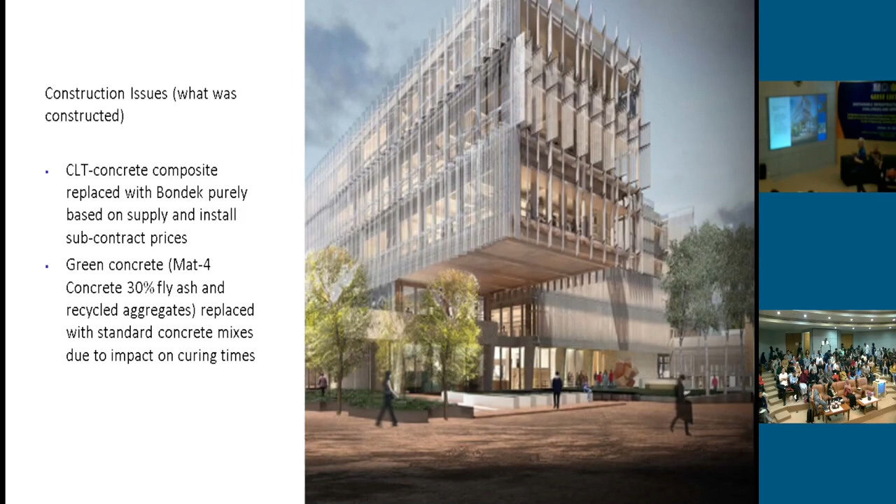So you can see that even though we talk about sustainability, you have to think why do you want sustainability. From different perspectives, you have different priorities. So for an architect, they will say yes, we want green concrete. For a builder, we do not really want green concrete - it slows down the construction process.

So what were the lessons learned? I've just given you a case study. What were the lessons learned when you start thinking about sustainable construction? Easy wins or low-hanging fruit will be to recycle and reuse materials. Common sustainable features like rainwater harvesting are easy.

Double glazing - I'm not sure if you use a lot of double glazing over here. We were at the Ritz-Carlton yesterday and your glass is still single layer, very thin. Sun shading, like what we've done over here, reduces heat gain, and you could do the same here in Indonesia.

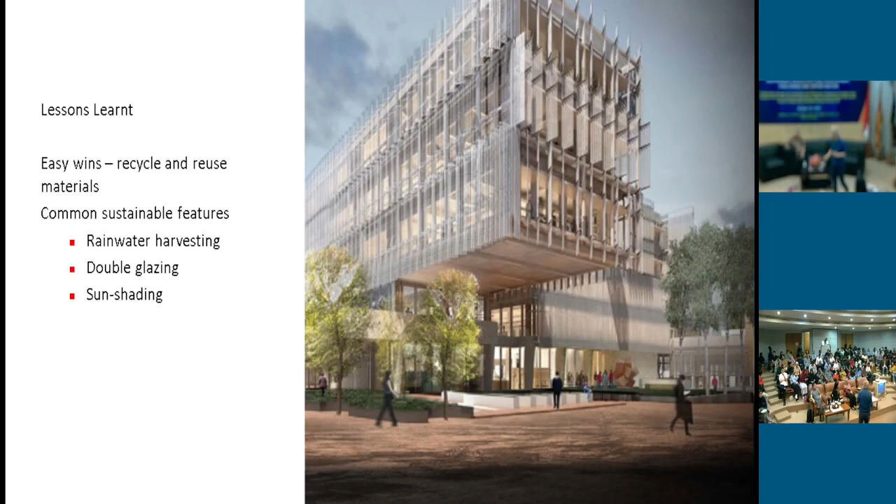But if you are intending to design or build a completely new building following these sustainable design practices, you've got to spend a little bit more time thinking about what works and what doesn't work. We have compared the advantages versus disadvantages of green concrete - green concrete takes a much longer time to gain strength.

Buying your materials from overseas increases supply risk. Remember during COVID, what happened - there was a ship that got stuck in the Suez Canal, the Ever Given, right? So can you imagine if your materials are on that ship and you're building this halfway - your project's going to be delayed. You also need local experience, local equipment, and skills.

That's it, perfect timing. Any questions? Wait, go back one. Any questions?